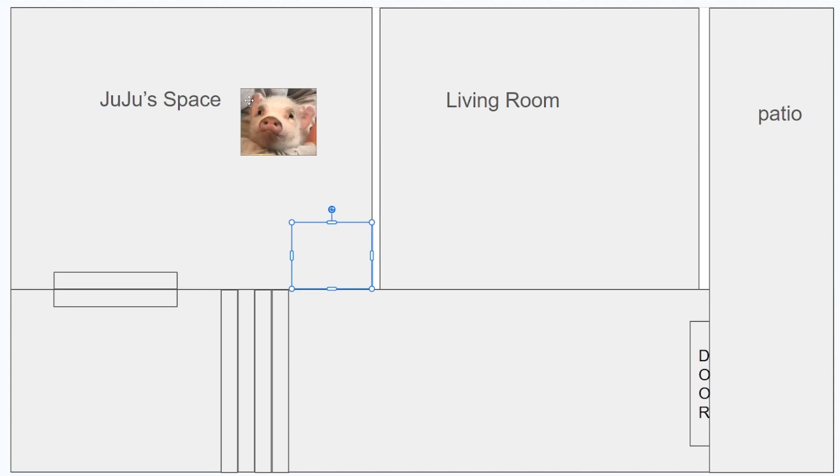All of a sudden, while I was thinking about the gift, I heard an oink sound. Yes, my sister kept a pig as her pet. His name is Juju. Why don't I just do something with Juju? So here's my idea for the gift to my sister.

So this is kind of the layout of our house. We have a Juju space here where Juju sleeps and walks around sometimes, his free space. Here's the living room, and here's like a hallway. These are the stairs, by the way, and then there's a patio over there.

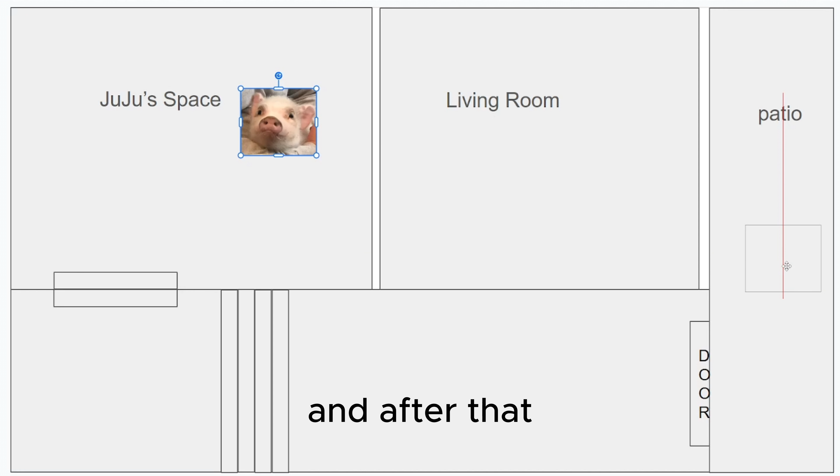So Juju has a morning routine every single morning. He would come up those stairs and hit the patio first, get his breakfast in, and get a little vitamin D, sunshine session in. He would just lay here and get his tan. After that, he'd come back and walk around the living room.

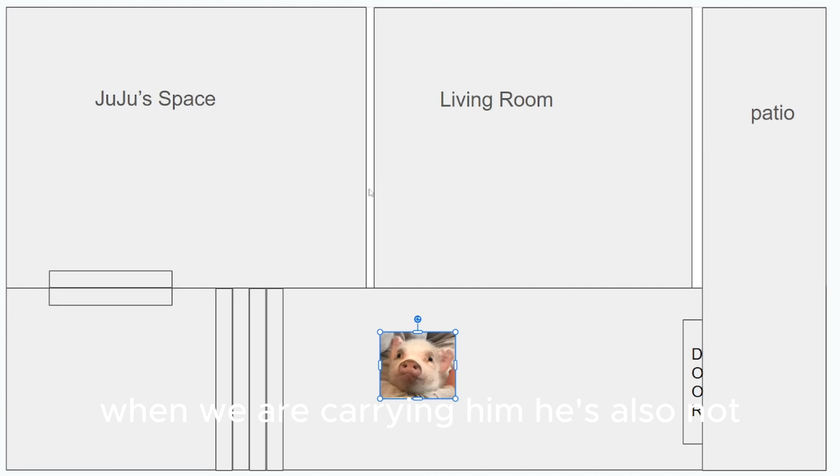So whenever Juju's finishing his routine, he just hits the elevator and goes back to his space to sleep. We don't have to do anything—it's hands free.

So this is my first ever DIY project, and along the way I'm still kind of figuring things out. Before I start, though, I generalized the whole process into three different phases.

The first phase is completing the idea: you have to think about how the outside of this elevator is going to look, what parts you need, listing the materials, and then designing the circuit and code. That's the designing phase. The second phase is where your idea is more complete and you get your hands on it to build it. In the middle of building, you'll realize there's always some limit to your design. Then you have the final phase, where you modify, test, and improve your design.

So let's talk about the first phase. I've separated it into three sections. The first section is, of course, how the elevator is going to look, which I'm doing through CAD. I have a complete CAD design with the first full idea of how this elevator is roughly going to look. Then there's coding, where you define what kind of motor you need, what kind of sensor you need, thinking about the situations where this elevator will be used. The third section is the circuit design—after you get every material, you want to connect them. So here's my CAD design.

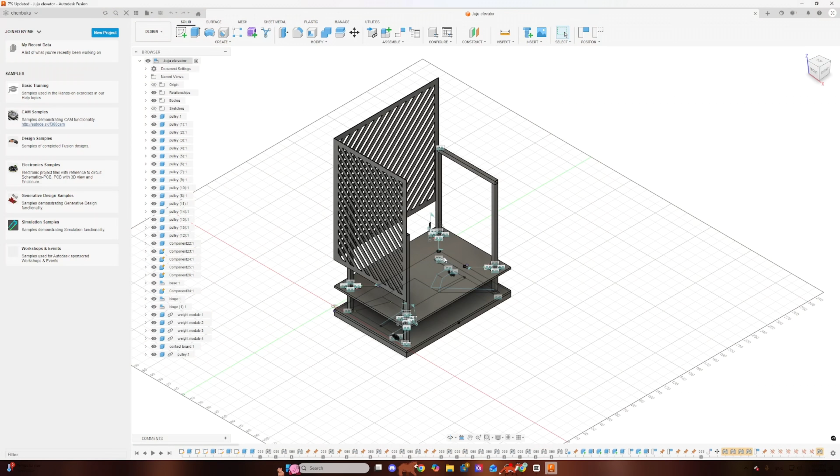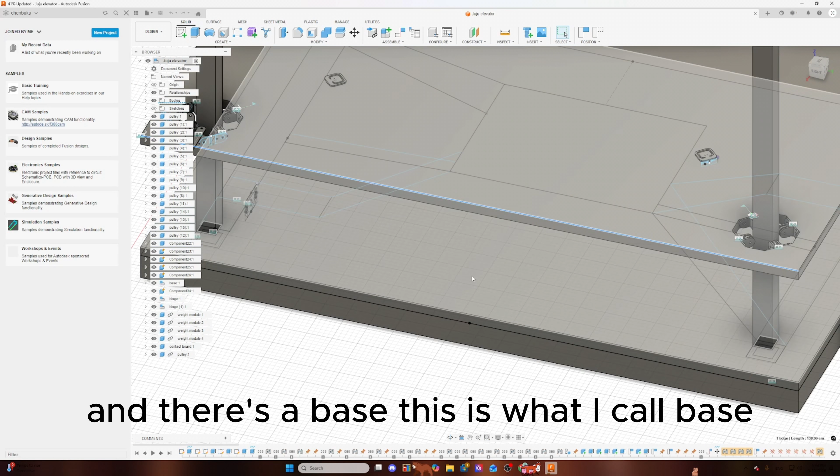So this is my CAD for the elevator, and as you can see, it's pretty solid. There are different components to this: the contacting plate—this part here—the contacting board, and there's a plate below it, and there's a base. This is what I call the base, and there's also a fence, which is what keeps Juju from jumping off. And there's also, of course, the poles over here. So let's talk more deeply about each.

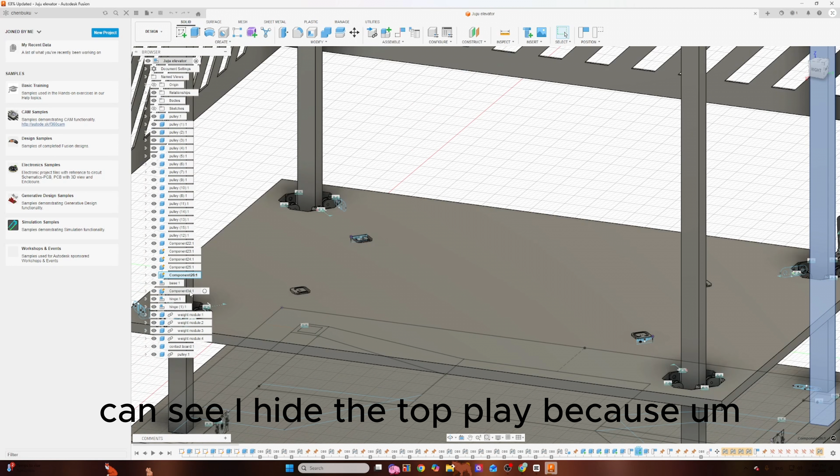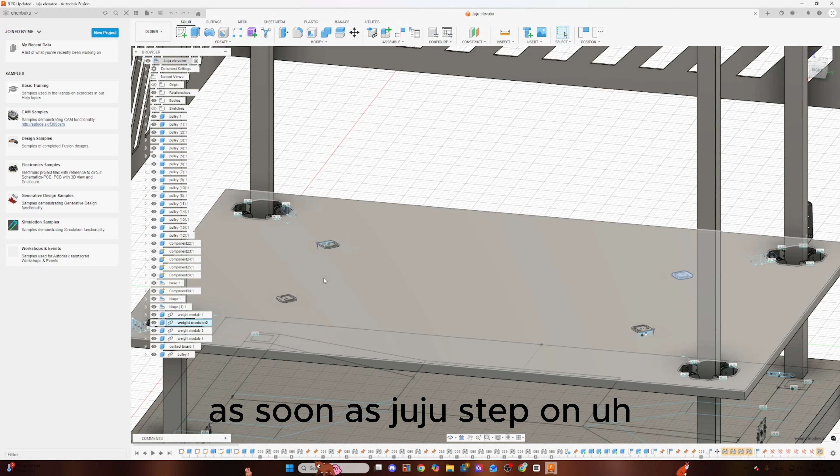So the contacting plate. As you can see, I hid the top plate, because the top plate is where Juju is going to be standing, but below that there are 4 different weight modules here, and these are just to test what's on top of the contacting plate and to see the weight change of that plate. Because as soon as Juju steps on it, if the plate doesn't move, then this weight module is gonna sense more weight, right? Because there's stuff on it.

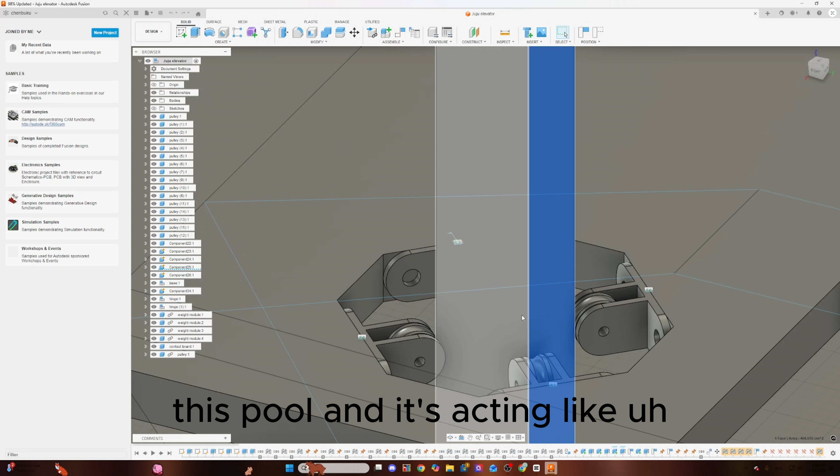Yeah, so this is the idea. And what's pretty interesting is here, where I have pulleys against this rail, and it's acting like it's rolling on a rail. So theoretically it won't rotate, right? It won't tilt. We can keep the platform moving up and down really level, theoretically.

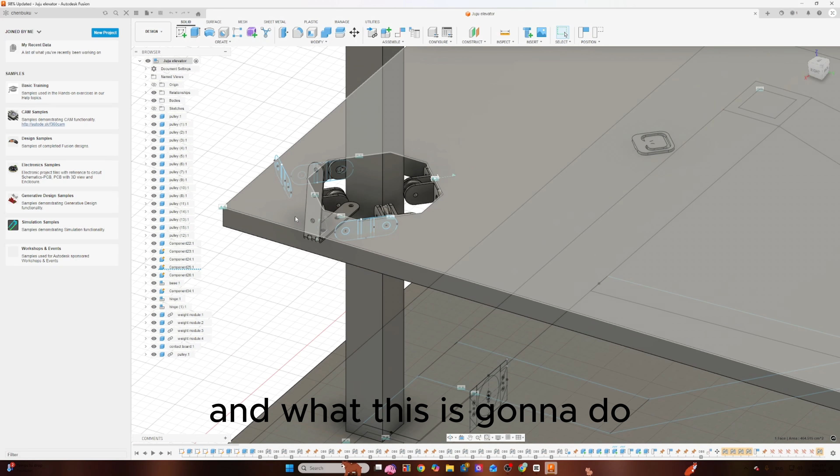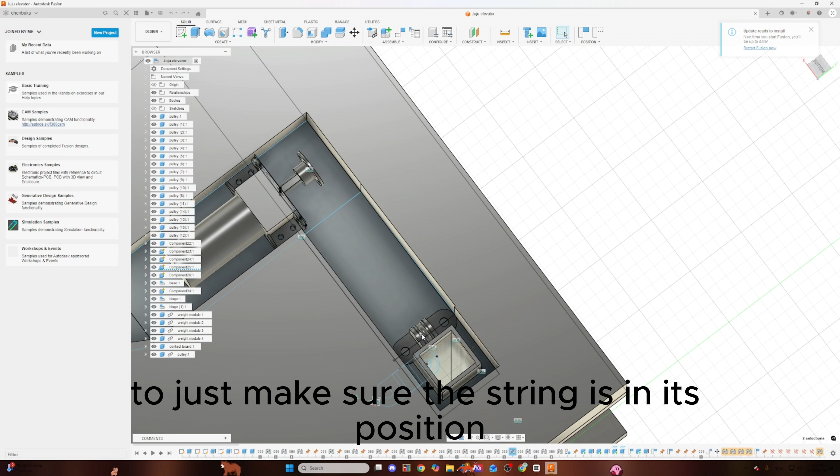And here I have a hinge, and this is gonna be attached to a string that's gonna cross the top here and go through the pulley. So wait, sorry, hinge here, go across the pulley, and go into the pulley, and right below that there is a pulley again just to make sure the string is in its position, and attached to this is a little motor where it's gonna spin and pull the string up. So that's pretty much it for the contacting plate.

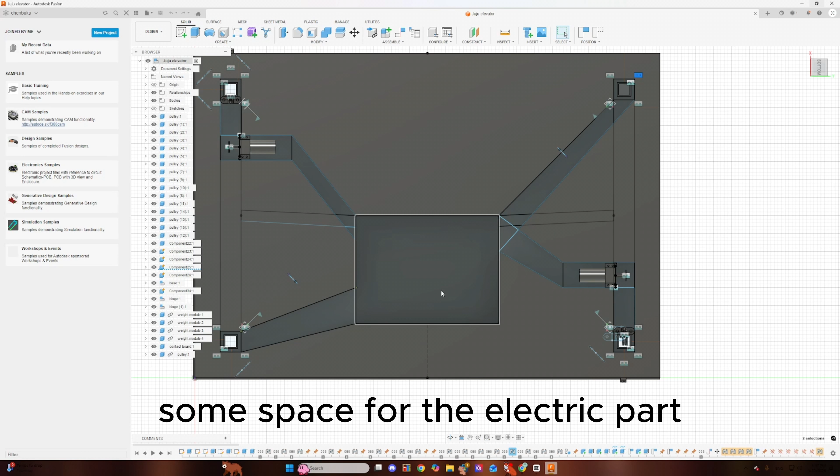And let's talk about the base. So here I have already cut off some space for the electrical part, where I put my circuit. And these two tunnels, if you may call them, are for the power supply, which I'm gonna put right here, because this side is closer to a plug.

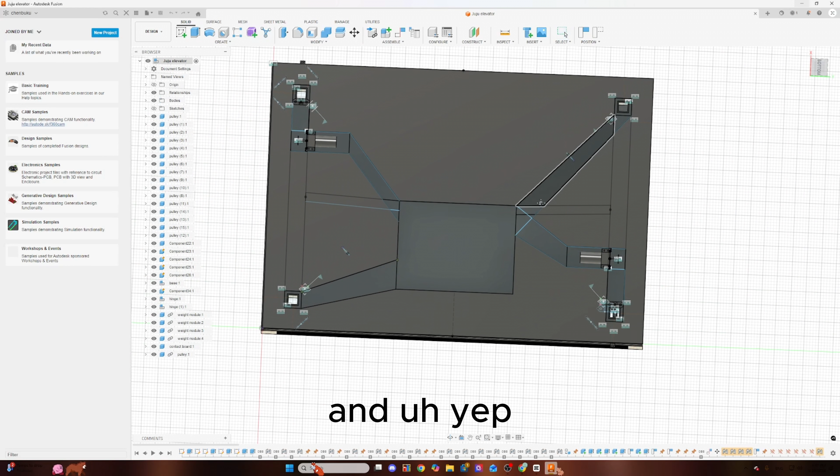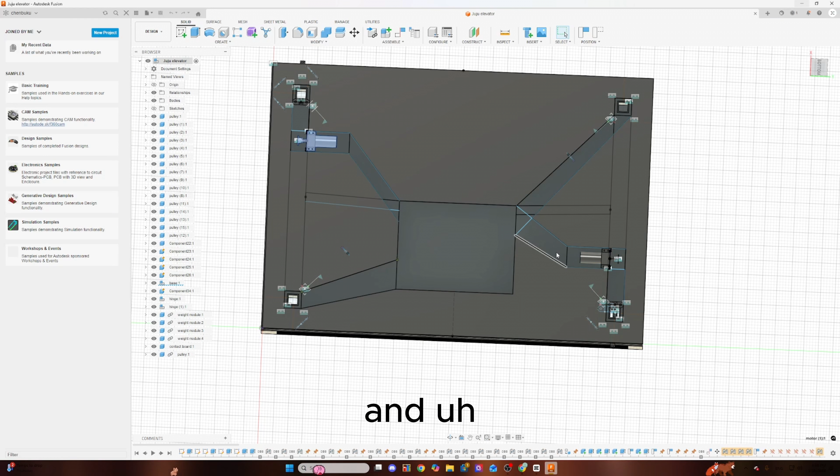So the power supply wire goes through here, and then to the two driver panels here, and then the Arduino, and then the weight module is all here, and here's the motor. The motor is gonna be here, and there's obviously wire gonna go through that too. Motor here going through that too, and that's pretty much it. So that was my CAD.

And let's talk about my code right now. So I know a lot of you guys think coding is so hard, so complex, but at least for this project, code is relatively easy. And I'm gonna explain it in a very detailed and well-structured way so that everyone watching this video will understand. But if you really hate coding that much, you can just skip along to the circuit part.

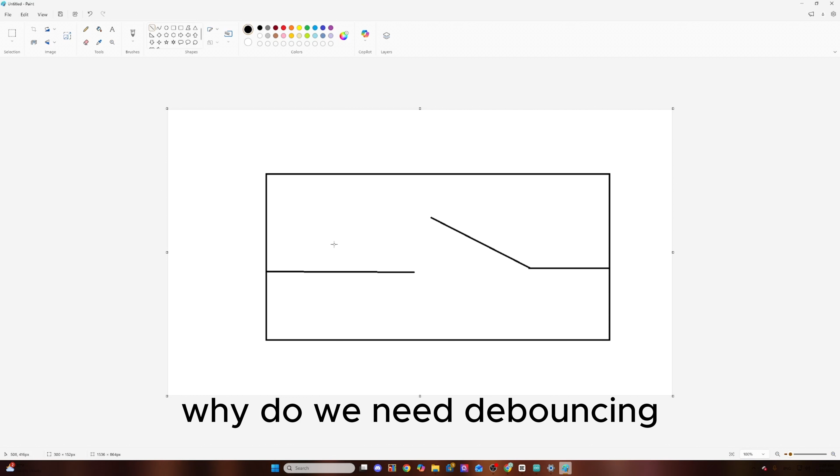Okay, so here are some debouncing variables. If you want to know how debouncing works, here's how it works. But if you don't want to know about it, then you can just skip along. Okay, so let's explain debouncing real quick. Why do we need a debouncing switch, or what are we actually doing?

So let's just say this is a switch, okay? How a switch normally works is that you usually have a button, and you push down, right? So you push this wire to connect. After you connect, let's say this wire has 5 volts here, 5 volts here, and 5 volts here, 0 volts here. Once you connect it, this whole line becomes 5 volts.

So the other side reads the information, from 0 to 5 volt. So this is being connected, this is being pushed. That's the ideal case. Okay.

But realistically, most of the time, instead of just being pushed down and connecting once and for all, how a switch works is that it doesn't usually just go down and get stuck there. Usually there's a little harmonic motion or whatever. It doesn't stay there. It goes up again and goes down, goes up again and goes down. And this all happens probably like 1,000 times in a millisecond. So it happens really fast.

And you don't want to confuse the computer about what is going on, or you don't want to hurt the motor, because the motor depends on the switch and has to react to the switch, and you don't want to hurt the motor from turning on, turning off, turning on, turning off. So we want to debounce it. And I have debouncing code later on in the code that I will talk about later.

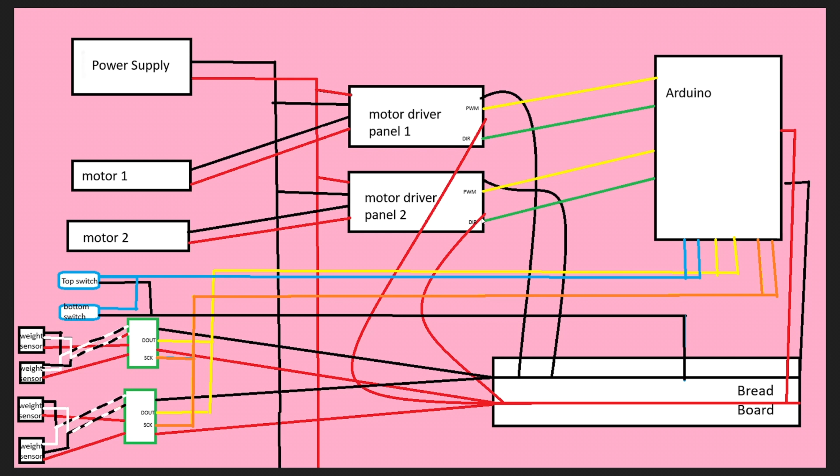On the left side here, if you can see my cursor, this part is how to wire the HX711. I'm sure not everyone is interested in it, but if you are, this is how you wire them. And this is pretty much it. Now look at it, I'm sure it's a lot more manageable than when you first looked at it. So that was a pretty detailed explanation of my designing phase.

And after that, now it's the building phase. I'm gonna show a couple clips of me building, but essentially I met a couple critical limitations of my design that I'm gonna explain later after I show the clips. But here's the clips.

Alright guys, it was New Year's Eve yesterday, and I was staying at home working on my project, so I didn't go to the strip to see the fireworks. And I was thinking of the fireworks, and I was like, let's do some makeup fireworks. And there we go.

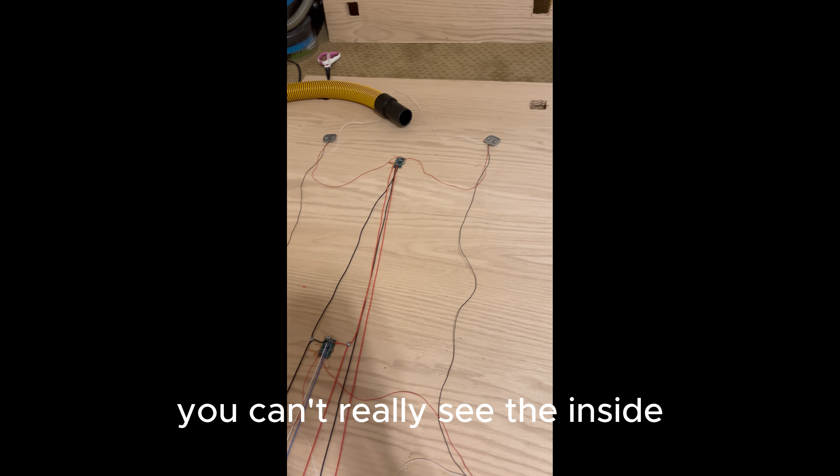Okay, so this is so far what I have for the finished contact board. We got four modules right here. It's not taped yet because I'm gonna tape it onto the upper board, and once I tape it, you can't really see the inside. Cable managing and some soldering onto the pins, because I don't want to do the female-male pin method, because this is gonna be moving a lot, and I'm scared it's gonna come off. That's why I'll just solder it onto the board.

Okay, this is the frame I've been building today. It took me literally 2 hours to make this because I'm cutting pieces like this, as you can see, with a hand saw, so it's really painful. But I did this pretty good. It doesn't look pretty because it's a little chopped, not straight. But as you can see, it can support itself pretty well. It doesn't wiggle at all.

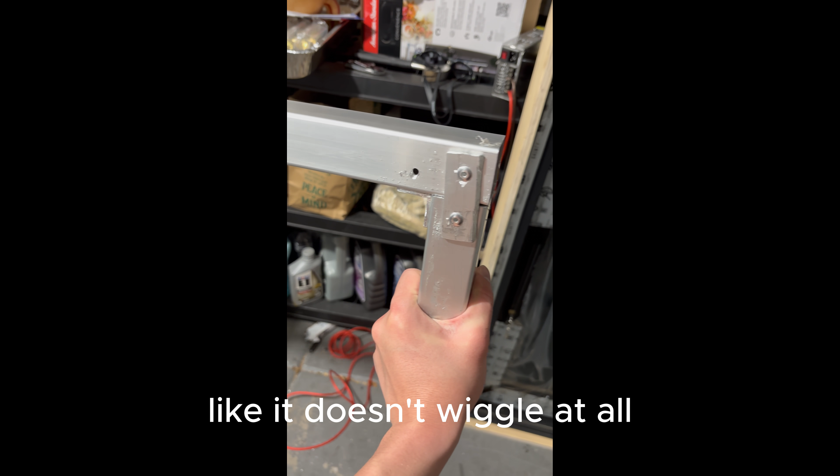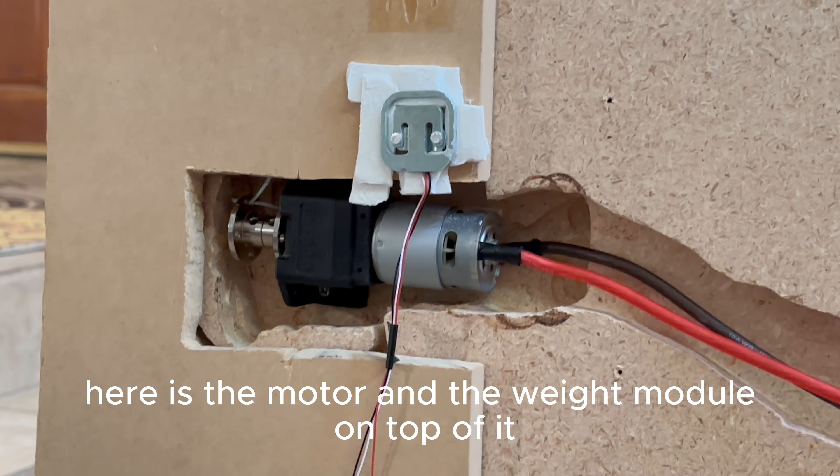So this is my actual circuit. And here you can see it's the Arduino, the two black motherboards. These are the motor drivers. And here's the motor and the weight module on top of it. So the weight module, at the end, was changed to the base.

So that was a lot of clips of me building, and let's talk about the limitations now. The first big limitation I met was when I was dealing with the weight sensor. The weight sensor didn't really work. The original plan was to put a weight sensor in between the two contacting plates, kind of like sandwich it and just put it in the middle.

And that didn't really work out because the weight sensor sends a really weak and small voltage to the HX711, which is the controller panel. But that is very easily altered or affected by the environment. And also I'm connecting them with a very long wire, which means there's a lot of noise along the wires. The longer wire you have, the more noise you experience. So the readings were very inconsistent.

So I came up with a solution to put the weight module at the bottom. Theoretically it works the same because, in terms of physics, once Juju steps on the elevator, the weight of the elevator as a whole increases. So if you put the weight sensor at the bottom of the elevator, it theoretically still works the same. The only downside is that the elevator is very heavy, and Juju could be proportionally smaller than the weight of the elevator, which might make the reading a little harder to read, but we'll see.